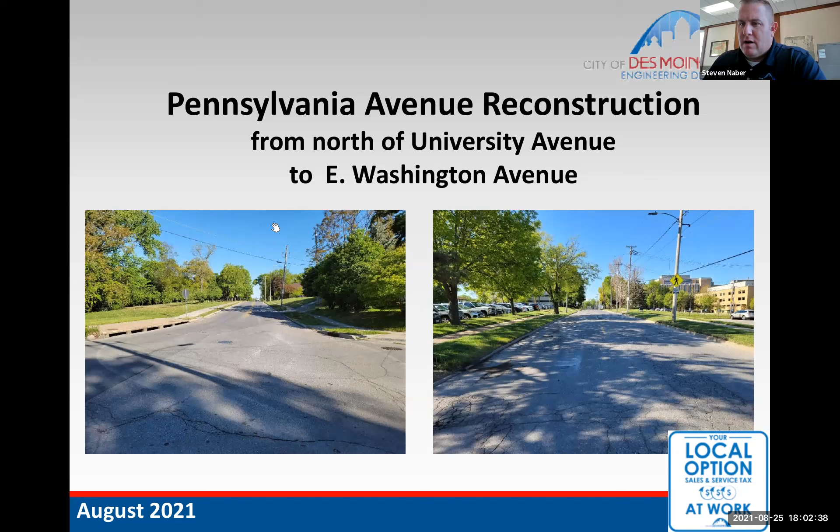Good evening everybody. My name is Steve Naber, I'm the city engineer for the city of Des Moines, happy to present this project, the Pennsylvania Avenue Reconstruction project. The limits are from just north of University Avenue, where the concrete ends, all the way north to East Washington Avenue. This meeting is to talk about what that project is.

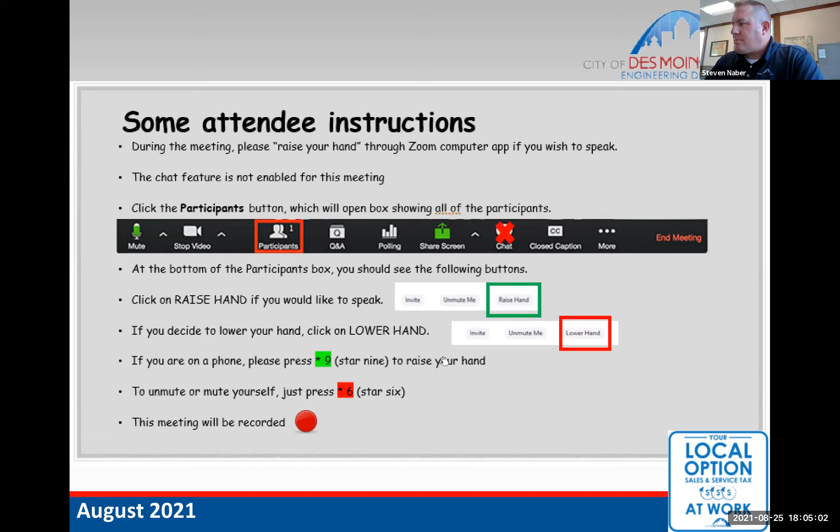This project, as you can see at the bottom of your screen, is actually funded thanks to the local option sales and service tax. Thanks to the passing of that tax, the city has accelerated a lot of roadway improvements, including this one. That's how this project is being funded, through local option sales and service tax. That's pretty much solely the funding source. It's not going to be an assessment or any tax directly on any of the adjacent property owners.

I want to cover why this project is needed, what the proposed improvements are, the anticipated sequence of construction and phasing, and the schedule, and then I'd like to open it up for questions and comments. That's what I'd like to cover today. Again, we're talking about Pennsylvania Avenue between north of University and East Washington.

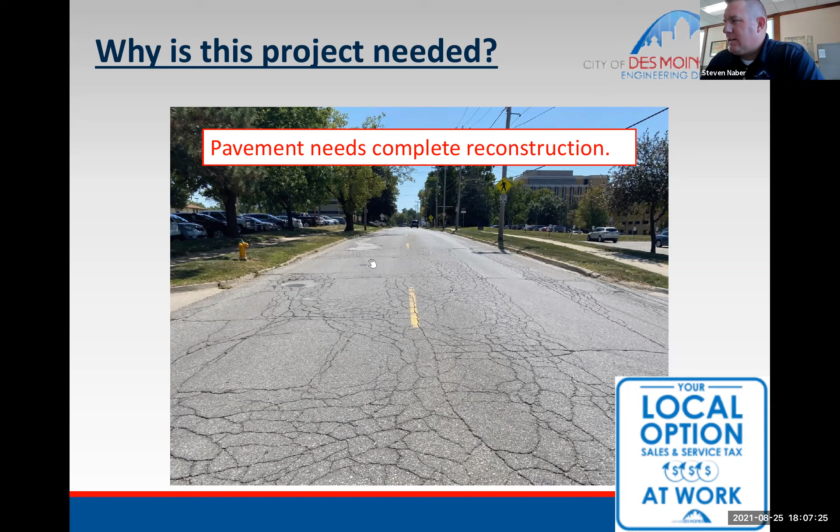In this case, this road resurfacing would not provide longevity, and it would not be the best application for this. So this road actually needs full reconstruction. That's the driver of the project, why this project started.

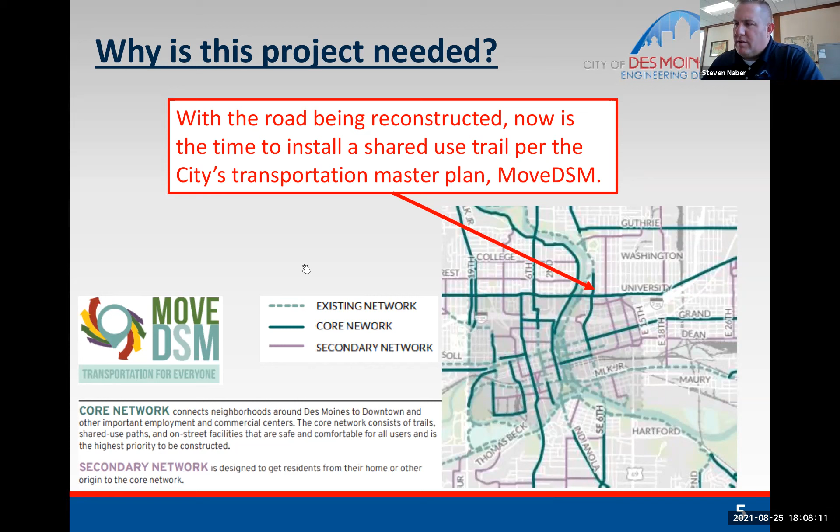When we do full reconstruction, we turn to our transportation master plan, called MoveDSM, and look at how we should put the road back. The master plan is our vision. As part of this project, this section of Pennsylvania Avenue is on the core bicycle network. So this gives us the time, since everything's torn up, to put the road back the way we want it, and also put in the shared use trail. That's also a need in our planning efforts. Since we're reconstructing, now would be the time to do that.

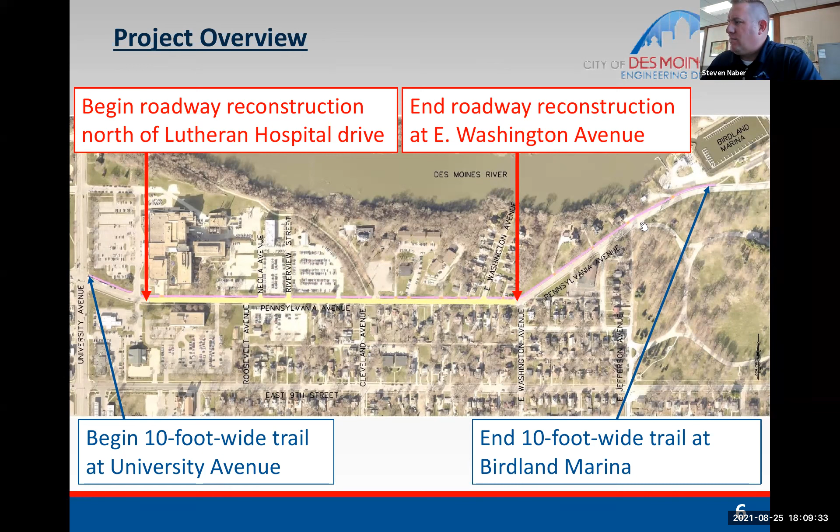This would be considered a collector or community residential street as planned in the Move DSM. 27 feet back to back meets the fire code, providing a street that, if there's parking on one side, emergency response can respond, and also allows two-way traffic with parking on one side. That's how we come up with the 27 back to back. It would allow the opportunity for parking on one side.

On the west side of the road, that's where we're proposing the 10-foot trail, roughly 5 feet off the back of curb. We generally desire a minimum 5-foot parkway, or grass parkway area. That's because 5 feet is typically needed to really allow vegetation growth, in addition to providing the buffer between the roadway and the shared use trail.

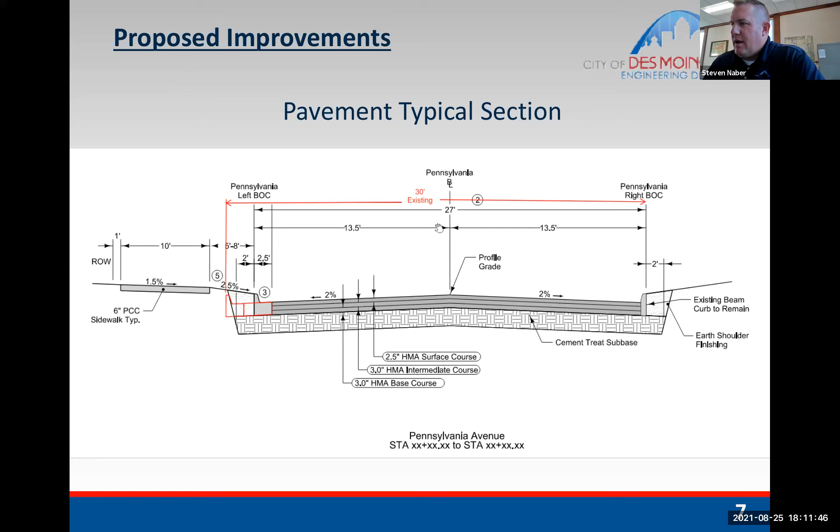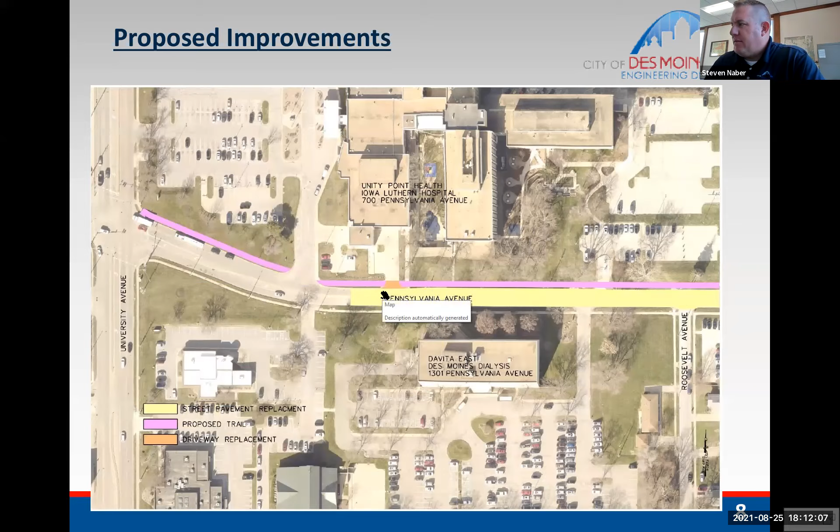Looking a little closer at the improvements, the trail starts at University and goes the full length, shown in pink here. The reconstruction limits are shown in yellow, starting just north of University Avenue and continuing on. Through there, the shared use trail will, in some cases, require new driveway aprons to be replaced - you can see them here in orange. The reconstruction limits stop at East Washington Avenue.

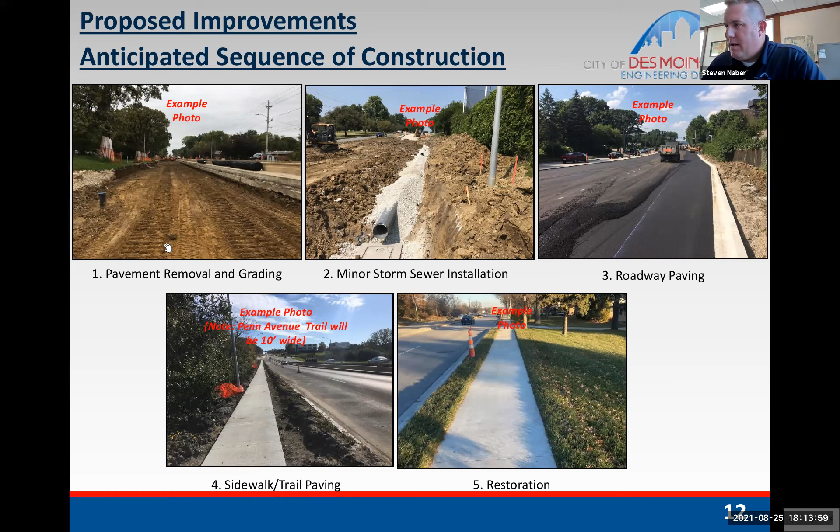So hopefully these photos give you an example of what we're looking at here. When we talk about full reconstruction, it's definitely impactful. You're talking about completely tearing everything up. And so when we do that, because we're tearing everything up, we've got to find a way to minimize as much as we can the disruption to our residents and folks that live and work along the corridor. And so we are proposing to do this in phases.

The phases start essentially from the hospital entrance up to Neola Avenue. You can see here's the detour, East 9th. During the reconstruction, we would use East 9th Street as the detour route for access. So East 9th will be the detour. Again, starting off in phases, the Lutheran Hospital entrance up to Neola.

Then we would go from Neola up to essentially just north of Cleveland. We have it listed here at 1410 Penn Avenue, and that would be the next phase, again still using East 9th as the detour.

And then the final reconstruction phase would take us up to East Washington. Oh, I'm sorry, actually the next phase would take us up to this western portion of East Washington, and then finally get up to Washington. So again, trying to do this in phases to preserve access as much as possible to the businesses.

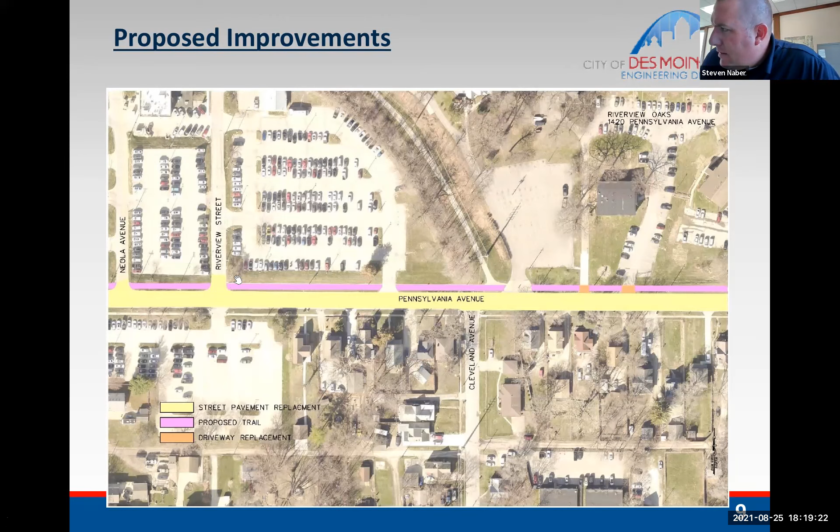Let me try to see if I can get this up. I have 3 drives, let me go here to your driveway. Bear with me a second, let me get up to the aerial. You're off of this Riverview right here, Jeannie? Yep. No, she's further to the north. Oaks up here, you're a little bit further. Riverview Oaks apartment, north, down one. Yeah, you're a little too far. My volume isn't great, it's a little difficult. So you want me to go one more north? Correct. Let me just go to the staging here.

Are we talking right here? Yes, I got the 6 buildings there. I've got 2 down in what I call my hole that only have 1 drive access, but then my other area, where my 4 buildings are, I have 2 drive access. My concern is when you guys block off, are you going to be blocking off all 3 of those at the same time? Are you doing it simultaneously? How are you going to do that? And how are my tenants going to manage, because right now I'm already at a problem with parking anyway. So if I pull my hole up here to my big area to park, we're not going to have enough spots.

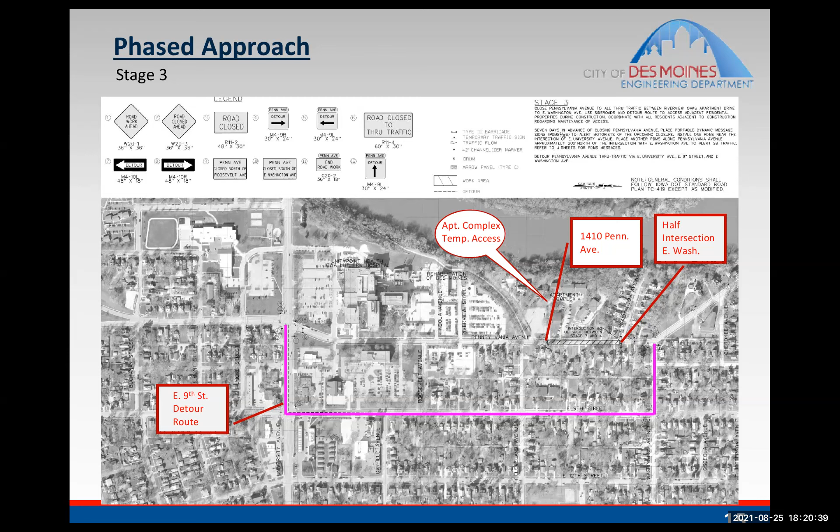This is Dave Camp. So the plan is that the number of parking spots would not necessarily be impacted. I think Brad may have been talking to the property owner, maybe not you as the property manager. So they've been talking about putting in temporary accesses between the parking lots to keep access in and out of those driveways when one is being closed, because I think you have three in that location. So having the contractor provide a temporary access between the parking lots so the folks can still get out and still access the apartment complex.

The same is going to happen up at the Lutheran Hospital. We just have a lot of high density parking in this area, and typically we don't stage this in so many stages, but knowing the density through here, we are chopping up the project into stages to keep people getting access back and forth to their homes. On the east side of the street, the density is not as high, so some of those folks may not be able to access their drives through the construction. It's just not feasible to hit every single driveway. But when you have a very dense parking lot like these, that's when we try to stage it as best we could.

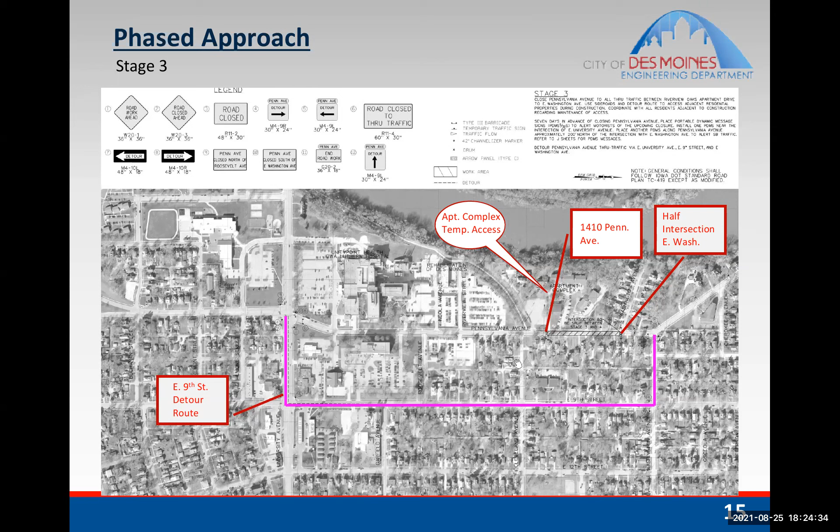Any other questions? Hey Steve, Jack Doherty here. Can you hear me okay? Yes, hi. I'm at 1706 Pennsylvania Avenue, so I'm just in the area where only the trail will be worked on, not the street, but I do have a couple questions.

When you talk about the schedule going through two seasons, would you open the street back up during the winter and then start construction again in the spring? Or what's the plan for the winter?

Yeah, that's typically the case. Brad or Dave, we probably don't have the staging set to where we'd get, but we typically would shut it down in the winter to obviously allow snow removal and those sort of things, unless we had a real mild winter. But that's typically when we're always shut down, especially in the heart of it.

So we would put in the contract provisions that they would have to open up Pennsylvania Avenue. Some contractors might get it done sooner than others, but we are probably planning on a two-season construction season, just so everyone's prepared for that. But yes, it would be open for the winter.

Okay, thank you for that. A couple more, if I may.

So at my house at 1706, and at the house neighboring me, 1712 Penn Avenue, there's iron curbs. I was not able to dig up the documentation yet, but I think it exists. At one point in time, the city talked about taking out the iron curbs and replacing them with concrete curbs, and there was some resistance to that. I believe there was a city council action saying that, due to the historic nature of those iron curbs, they were going to be kept.

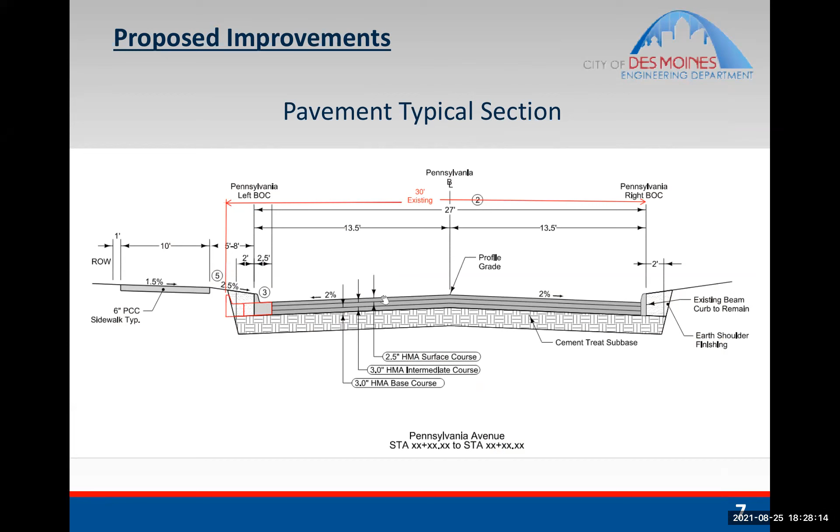What I'm trying to get a handle on is it sounds like the trail will still get pushed further to the west than it is now, so it would come a little bit closer to my property. Does that—so in your area, I'm just looking up real quick the exact widths that are here. Bear with me.

Just for clarification, and Dave and Brad, correct me if I'm wrong, but the street is actually only getting narrowed to 27 feet between the hospital entrance and East Washington, so south of East Washington. The street would probably stay the same width north of East Washington. But Dave, you're looking up how the trail—correct, so the trail would increase from, I think it's 7 feet to 10 feet, if I remember. Is that correct?

The sidewalk in front of your house currently is a little bit wider than a normal sidewalk, but not quite wide enough for a trail. So it's just trying to fit an extra 3 feet in that area. Brad and I have been talking about what to do and the concerns you had in front of your property as well.

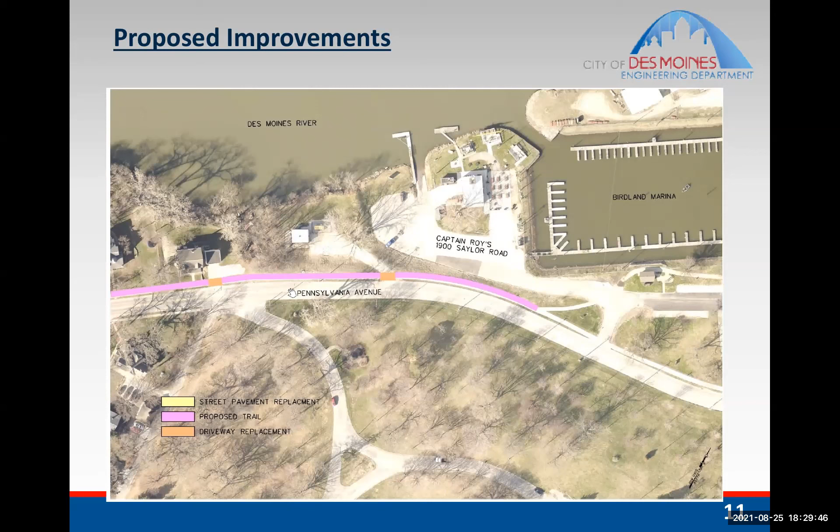We can continue to work on that. I don't mean to waste everybody's time, but the street width change was something new to me, so I wanted to double check on that. That's mainly south of Washington.

Also, it sounds like we'll need to lose access to our driveway for some period of time while that new trail gets put through there, which is part of the deal, which we're okay with. Just trying to get a handle on what we think the time frame of that might be.

Typically in this section, driveways usually take, conservatively, a day to remove the drive, a day to form it, a day to pour it, and 2 days to cure and harden. That's a very conservative estimate. Some contractors do it extremely quick and some take longer, so we usually tell folks about a week, just so you're prepared. When it comes in sooner than that, that's better. So that's just a rule of thumb.

Dave, just to clarify, you're talking about a scenario that would likely be north of East Washington. That is correct, because the trail is being added through the driveway there. The driveways in the reconstruction portion, shown in yellow, south of Washington, would be affected for the duration of the reconstruction, so there would be lengthy time periods where you'd be driving on gravel ramps to get to the driveway. Thank you for clarifying that.

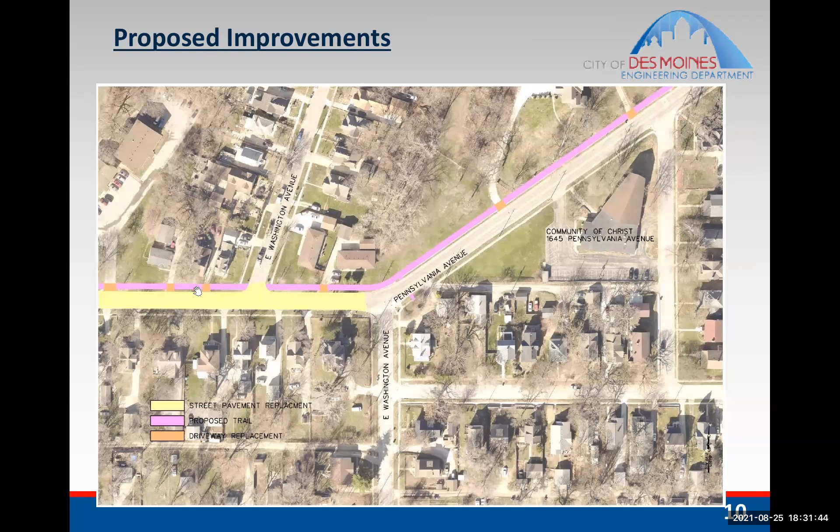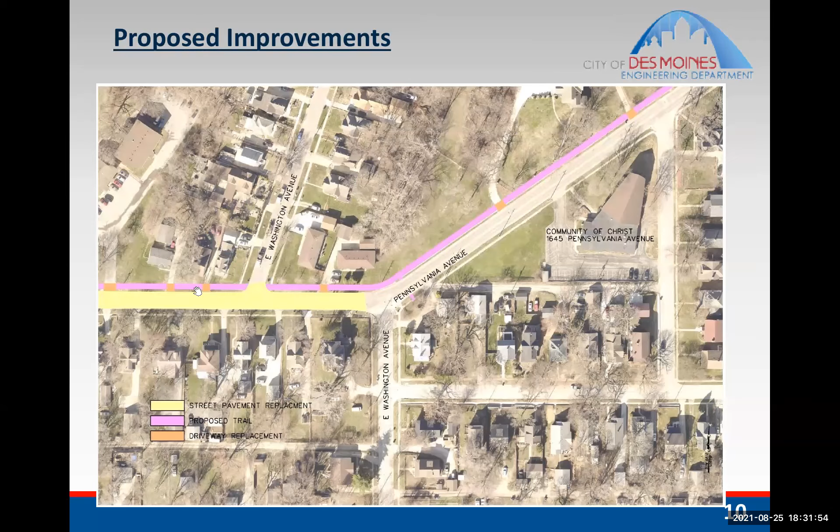Okay, we'll just plan on 3, 4, 5 days or something like that, and we can definitely work with that because we're excited to have that nice new trail. That's really all the big questions I had. All the others are kind of detail things that I can work with Brad on. So that's all for now.

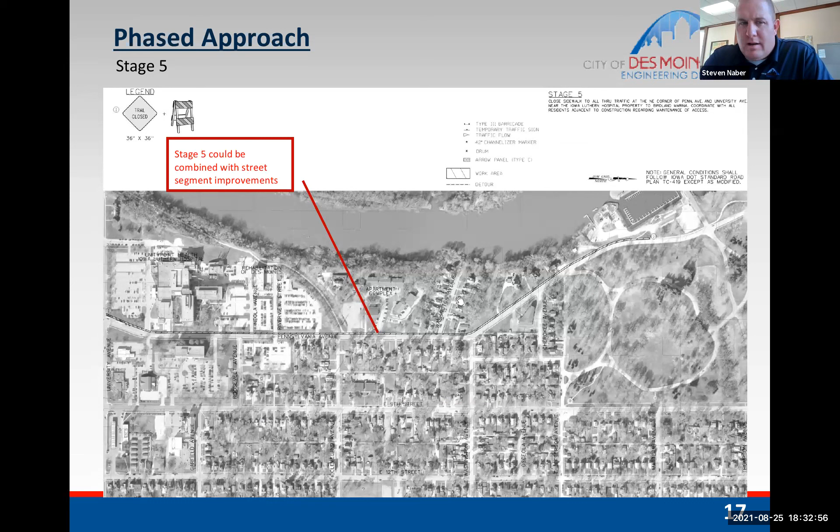And one question for Jack: is the iron curb something you want to see kept in place or removed and replaced? Kept in place would be the best option. And Jack, you could always have it removed and then hang it on the wall. Yeah, it would make a nice long shelf.

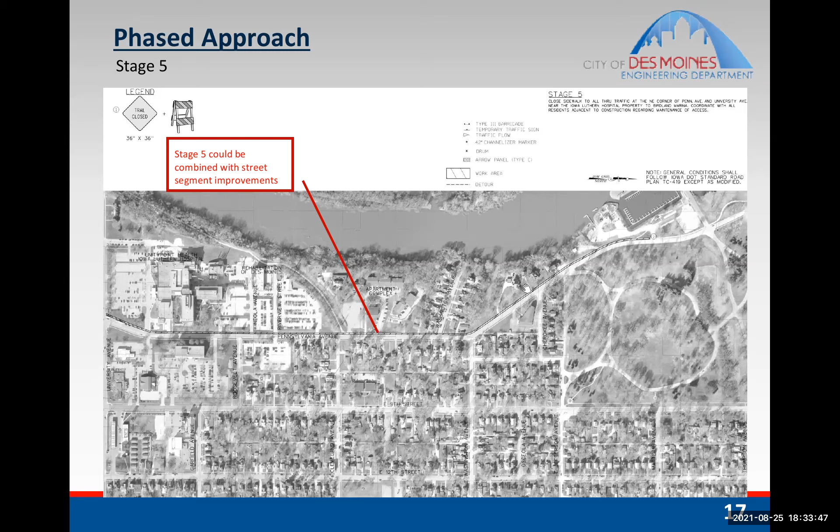Maybe the contractor needs to be aware of special events at Captain Roy's during this time period. Yeah, and maybe they need to be aware of lunch specials too. We'll make sure they know about that. Could help move that project along. Yes.